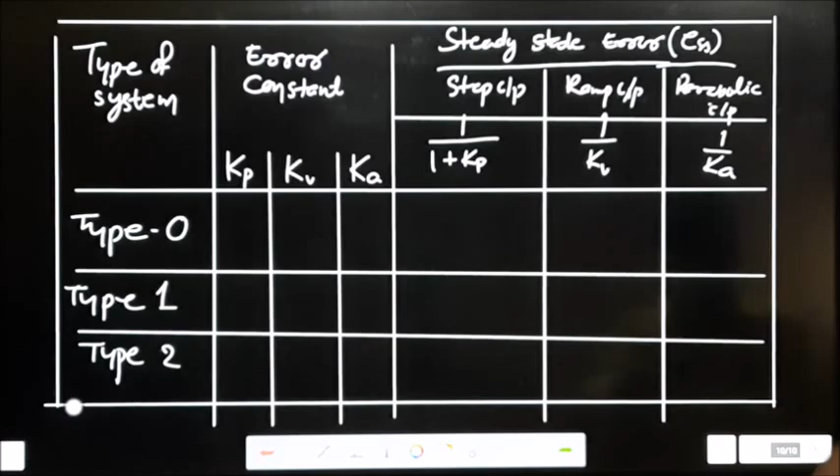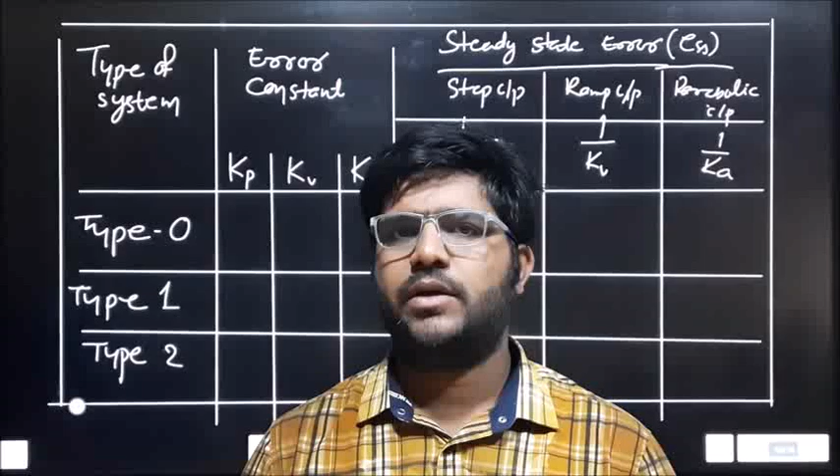So we have seen different types of steady state error by varying the input as well as the type of the systems. So in this table we have taken the type 0, type 1, type 2 systems with respect to the error constant, with respect to the step input, ramp input and parabolic input.

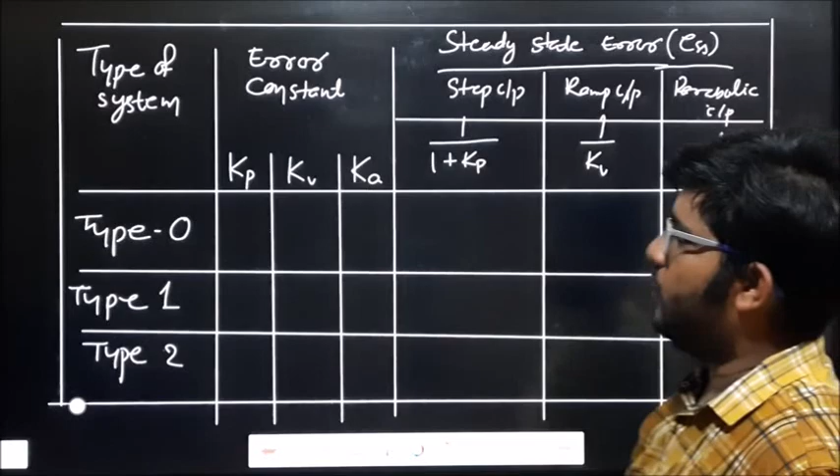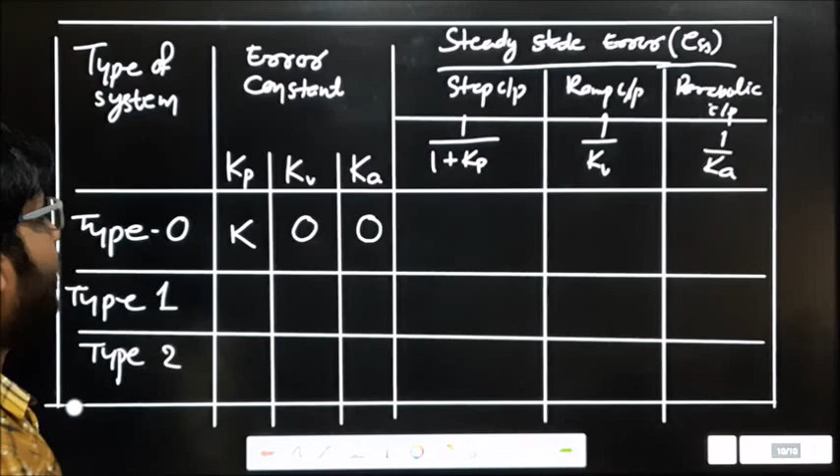So for type 0 systems we have seen that Kp is some constant value which is nothing but K. Okay, and we also saw that with type 0 systems my Kv becomes 0 and my Ka also becomes 0. So if I apply these values in these equations, I found that the type 0 system steady state error becomes 1 by 1 plus K. So instead of Kp I just replace K, so this is my value. And when I replace Kv and Ka as 0 here, I will get infinite error.

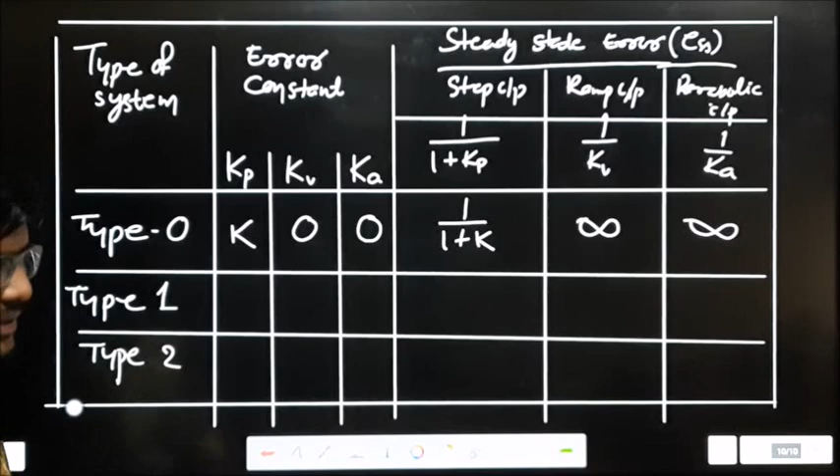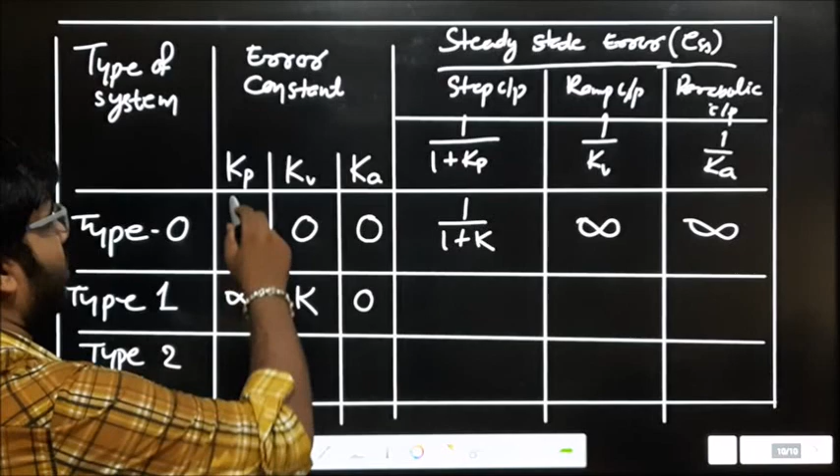Okay. Similarly, when I go for type 1 systems, in type 1 systems I see Kv becomes constant. Okay. And Kp I got infinite and Ka I get 0. So in this case, if I replace the value of Kp, Kv and Ka in these steady state equations, I easily found that this becomes 0, this becomes 1 by some constant K and this becomes infinite.

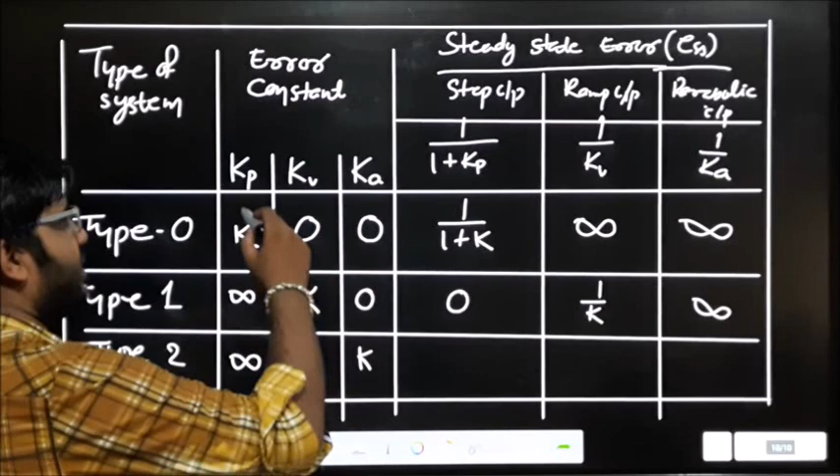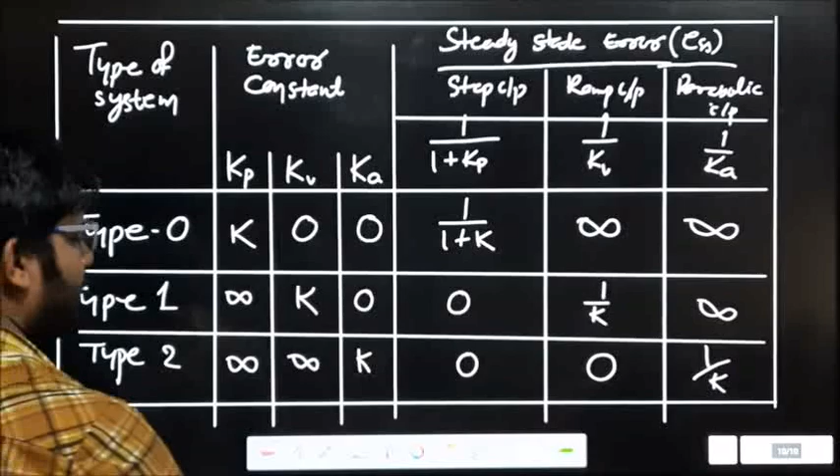Similarly, for type 2 system, I found Ka is some constant, whereas both my Kp and Kv become infinite. Similarly, once I replace the Kp, Kv, Ka values, I will get 0 over here, 0 over here and 1 by K over here. That means from this table, it was clear that for type 0 system Kp is constant, type 1 system Kv is constant, type 2 system Ka is constant.

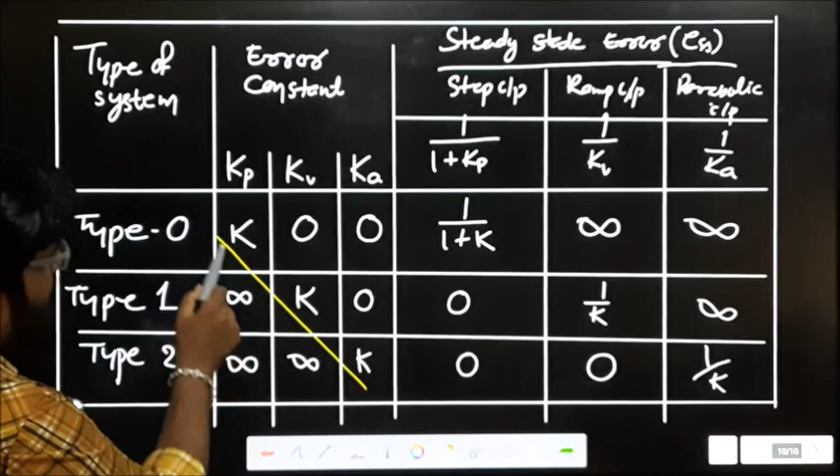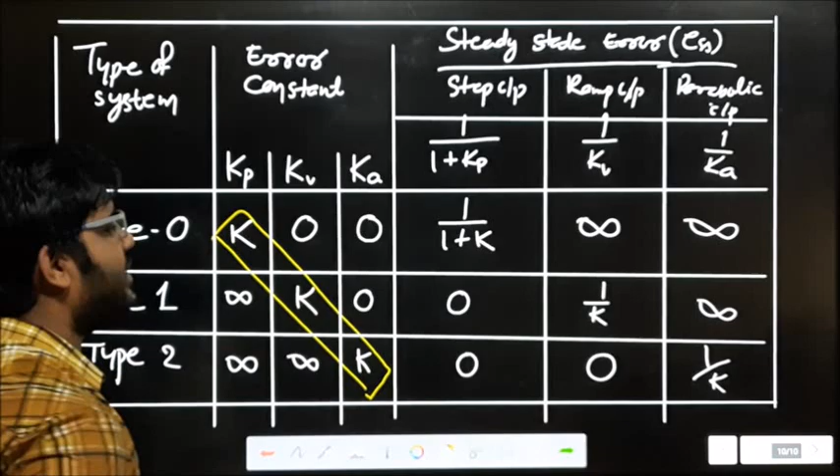So in this diagram, these things are constant. And the value left to the K will be infinite and right to the K is 0. For these nine boxes, if you see, here K is here. There is nothing on the left side, so we will bother about only the right side. I told you right side to the K is 0 here, and here right side to the K is 0. But I also told left side to the K is infinite, here also infinite. There is no left term here and there is no right term here.

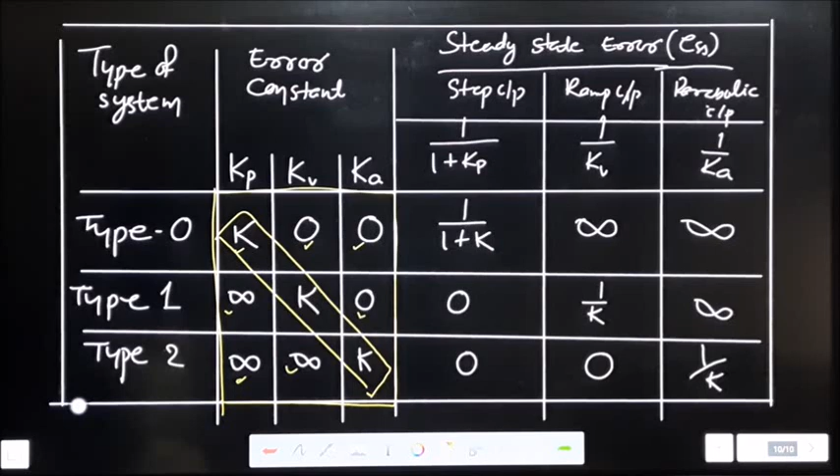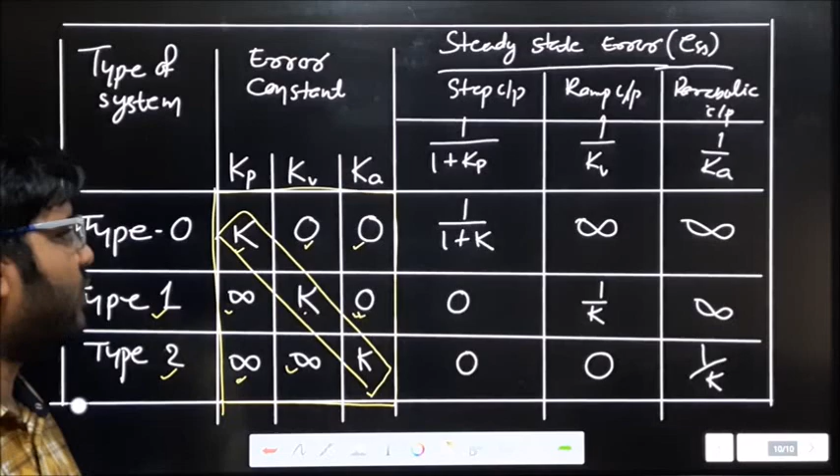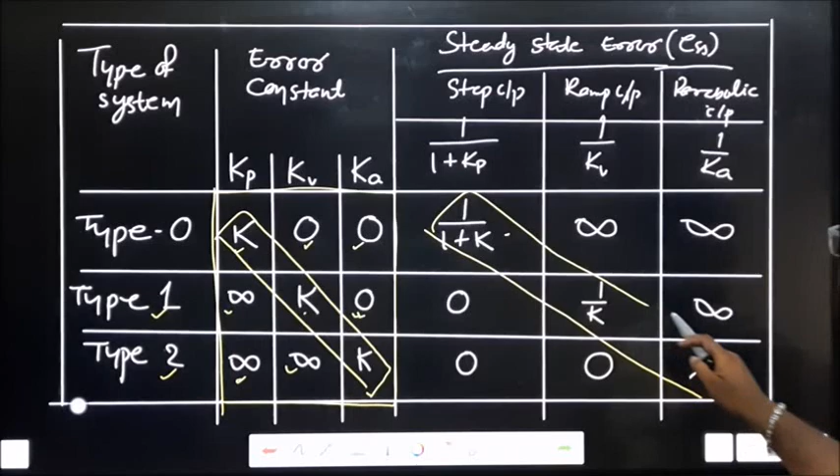That means it is clear that for type 0 systems, you should not get any infinite error constant. And for type 2 system, you should not get any 0 error constant. But for type 1 systems, you will get infinite constant as well as 0 constant and also some numerical value constants. And you can see from this steady state error, this is some constant value, this is some constant value, this is also some constant value. That means the corner term becomes constant and the remaining is reciprocal.

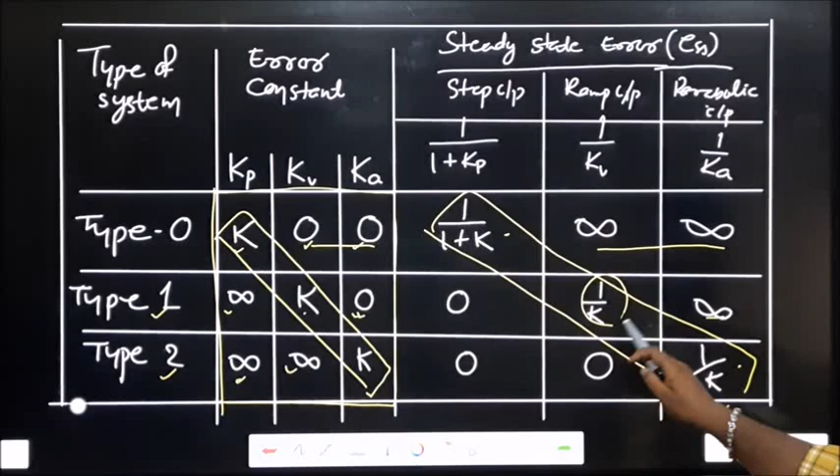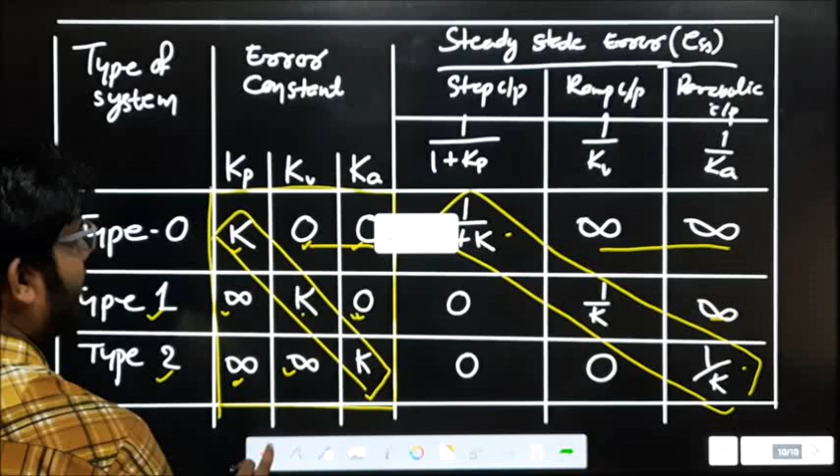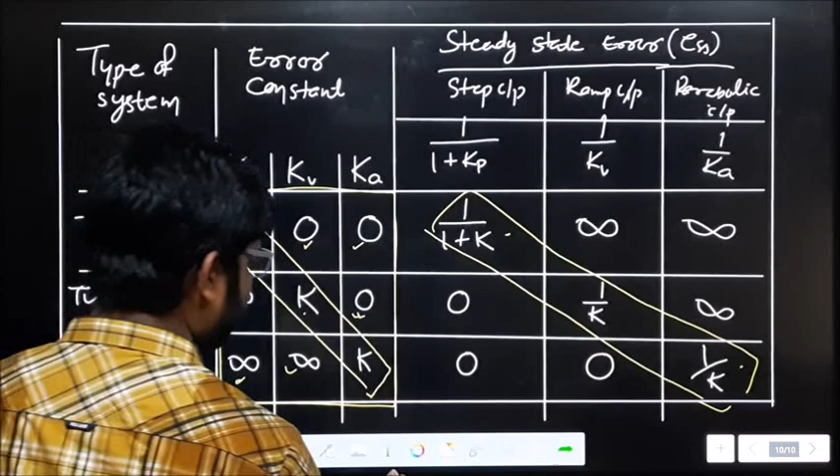I told K constant right side is 0, here constant right side becomes infinite, here constant right side becomes infinite, and here constant left side is infinite, but here constant left side is 0. Okay, so this is a table. If you want, you can take a screenshot of this table for your benefit, or you can write it in your notebook. Okay, you take this table. So this is nothing but different types of systems with different inputs.

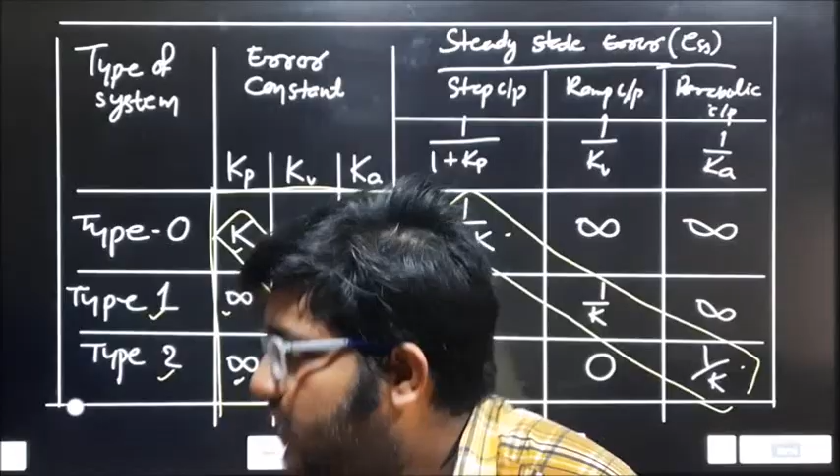In the last video, we studied the steady state error. We also studied the steady state error for different types of input and different types of systems. We have seen type 0 systems, type 1 systems and type 2 systems. Let us solve some problems so that you will get a better understanding.

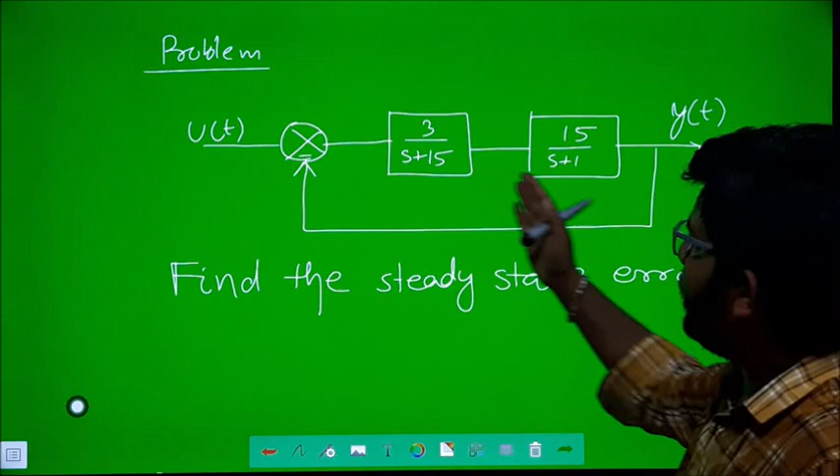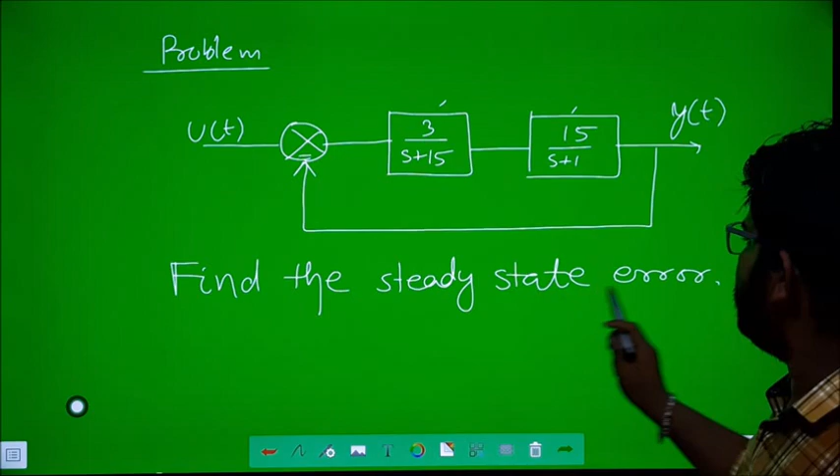Okay, the problem says I have a block diagram which consists of two forward path gains, and the feedback path is unity feedback. So here H(s) becomes 1. It is a negative feedback system. And the question asks to find the steady state error. Steady state error is ESS, and the formula is nothing but limit s tends to 0 of s R(s) divided by 1 plus G(s) into H(s).

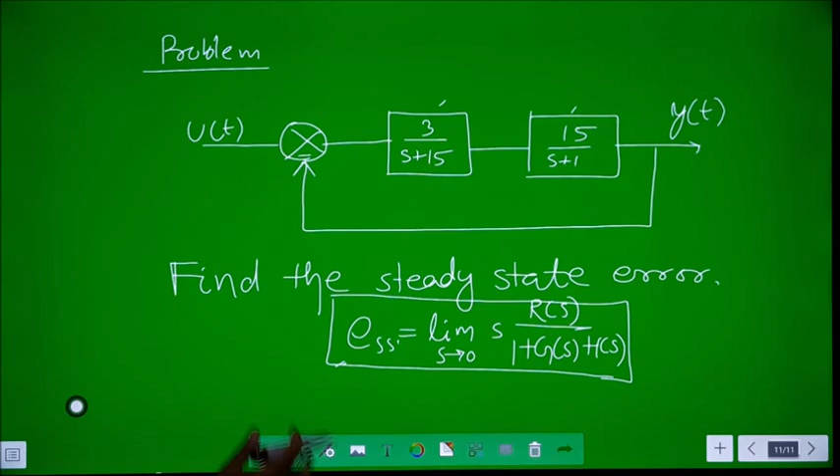So this is the formula. So once we find out the requirement to replace this formula, then it is easy to solve the problem. Okay, and so we do not go further. Let me try to make it very user friendly. So we need to find out first R of s. What is my R of s? R of s is nothing but my input.

Here, do you have any idea of input? Here input is u of t. Okay, by default u of t represents a step signal. Okay, u of t is a step signal. That means we can understand that as my input is step input, then which kind of error constant will we get? I will get Kp. Okay, clear? Up to this is clear, no?

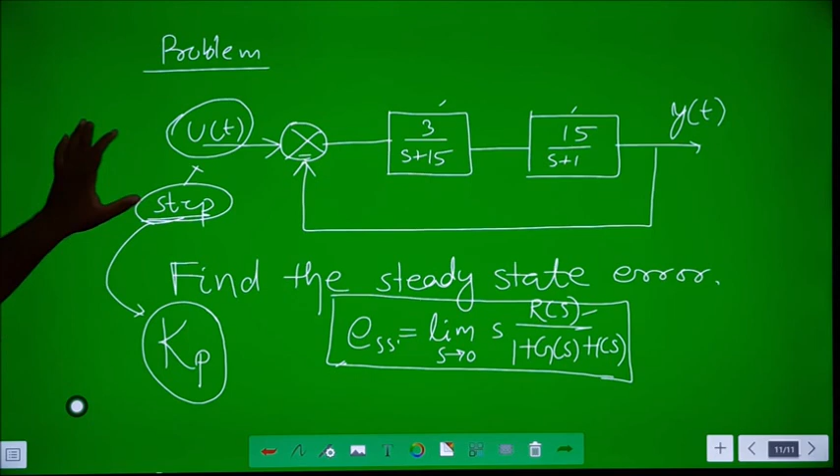That means once I found out the input is step, then with respect to step input, I should get my Kp, and what will my ESS be? ESS is equal to 1 by 1 plus Kp. This we have studied in the last class. Clear? This much we have found out.

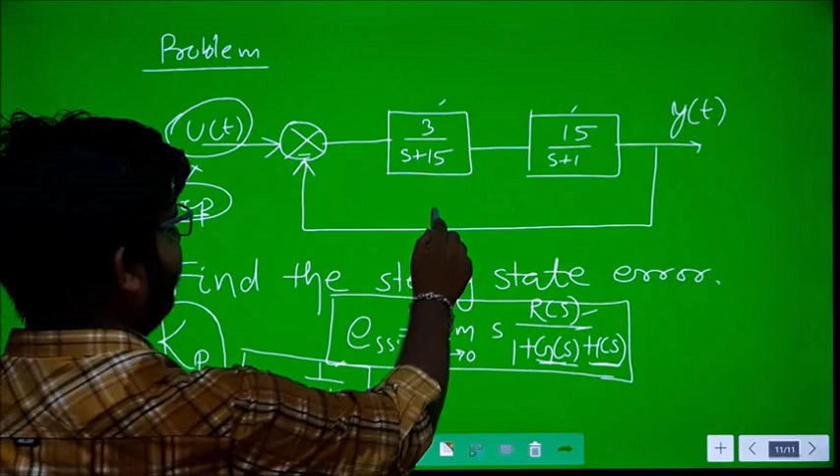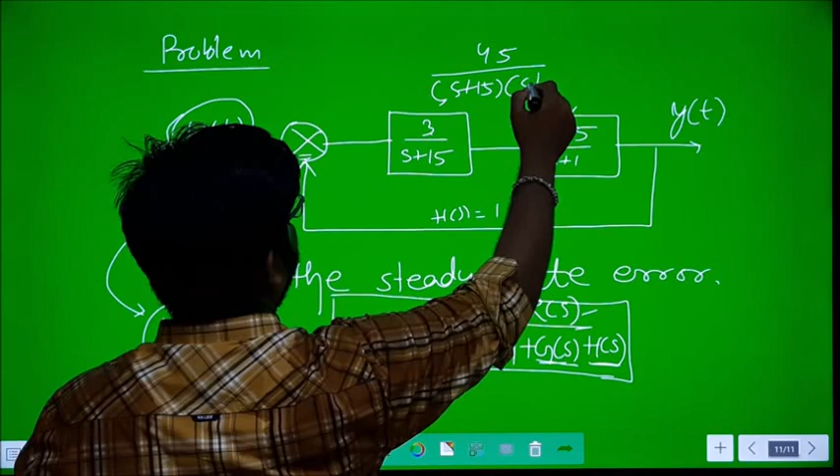Now, what do I need to find out? I need to find out G of s into H of s. Here H of s is nothing but 1. But what about G of s? This should be multiplied because this is in cascade form. I can write 15 into 3, that is 45, divided by s plus 15 into s plus 1. This is my G of s. Clear? Okay. So it is 45 by s plus 15 into s plus 1.

So we have found my G of s is nothing but 45 divided by s plus 13 into s plus 1. Let me recheck. s plus 15, not 13. s plus 15 into s plus 1. And also from the diagram we found that H of s is equal to 1. So ultimately G of s into H of s remains this value. Again we found that R of s, which is my input, is a step input. So we have found this Kp, and my ESS should be 1 by 1 plus Kp.

And Kp is equal to limit s tends to 0, G of s into H of s. And we can see that in G of s into H of s, the denominator has s of power 0. That means it is clear that it is a type 0 system. That means we are allowed to apply step input to type 0 system, so that one will get Kp is equal to K. So this much we have studied. Then what should I do?

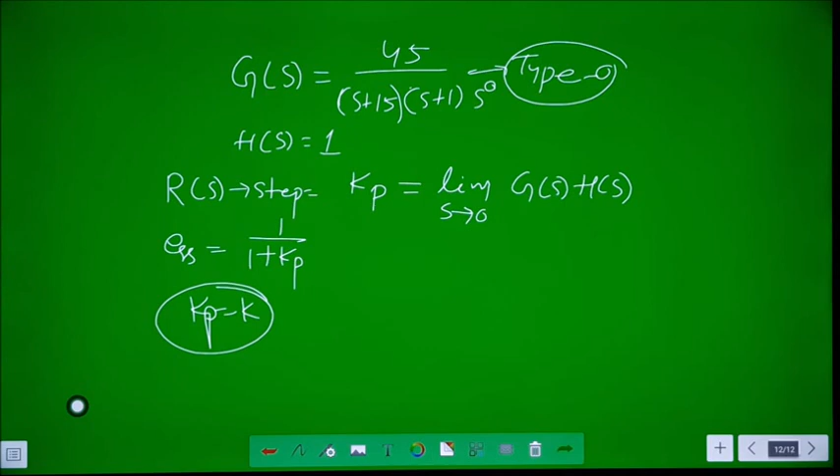So once we replace this thing, the next step will be to find out Kp. Kp is equal to limit s tends to 0, G of s H of s, which will be 45 divided by s plus 15 into s plus 1. So once you place s to 0 here and here, what do I get? Kp is equal to 45 divided by 15 into 1, that is equal to 3. So this is my Kp. Okay, and I also know that for step input type 0 system, Kp is nothing but K. So Kp or K is equal to 3.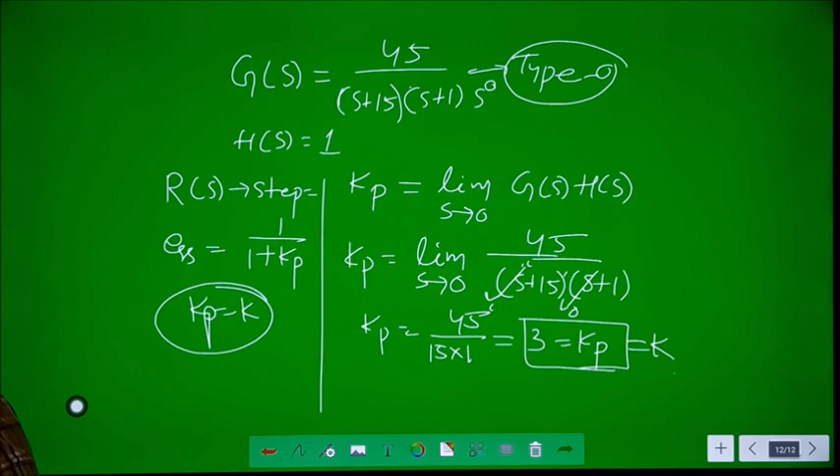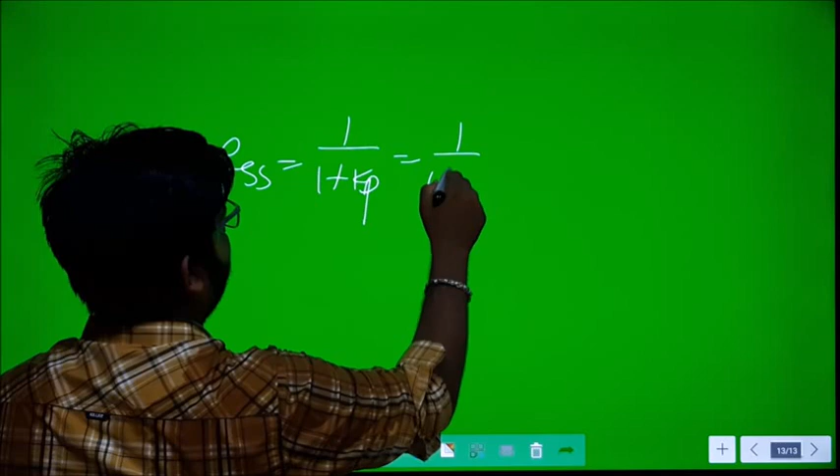And what is my ESS? ESS is nothing but 1 by 1 plus Kp. So I can write ESS is equal to 1 by 1 plus Kp or 1 by 1 plus K, that is equal to 1 by 1 plus 3, which is nothing but ESS is equal to 1 by 4, is equal to 0.25, or if you find ESS in percentage, it is 25% of error.

So that means it is very clear that if I find this kind of system and try to find out the steady state error with respect to step input, we will find that when time tends to infinity, my output deviates 25% with respect to the input. Okay, so this is the usual way to solve the problem.